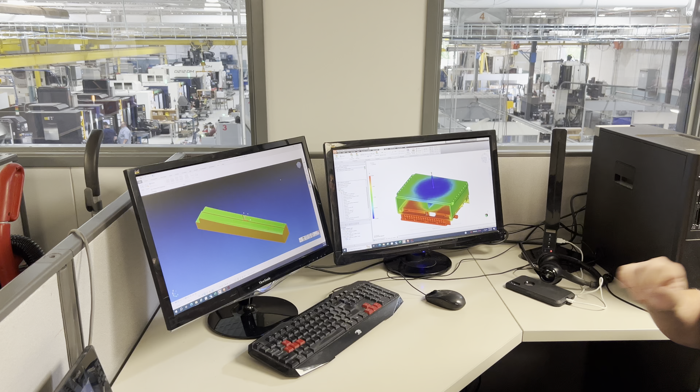So Dave, what are we looking at? So this is our Moldflow software that we use to analyze and predict what is going to happen to a plastic part when we injection mold it. It looks at warp, it looks at fiber orientation of the plastic if it has a fiber in it.

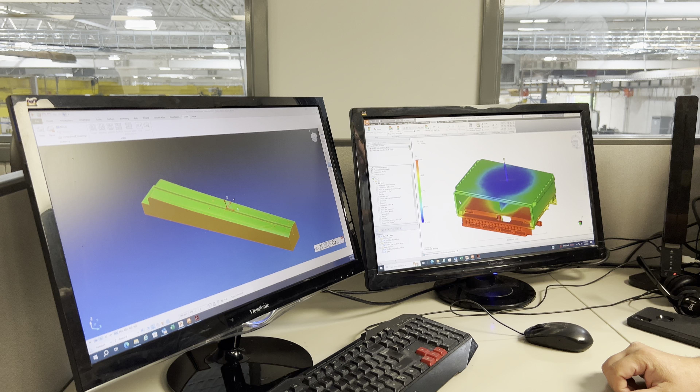It is basically like an FEA. It really doesn't do a lot with strength, but it will predict warp very well. And then, can we fill the part? Where are we going to gate the part at? This will tell you where to gate? Really? Yes, it'll give us a suggestion of, okay, these might be the best areas to gate, and then it's really up to the operator, the designer of the injection mold.

One, from experience of saying, okay, well, because of the style of machine we're going to use, the mold base we're going to use, may have some things that lock us into, okay, we have to gate in maybe a couple options that we have. So they'll decide which is the best option, depending on what mold base we're using, the materials and all that kind of stuff, to figure out where to place that gate at.

And we want to make it as simple as possible for gate removal at the end. Sometimes we have to machine the gates off. Well, that gets expensive because you have to build a fixture and all this other stuff. So if we can do it with a set of clippers or a file or a razor blade to take a gate off or just breaking it off, then that's what we do.

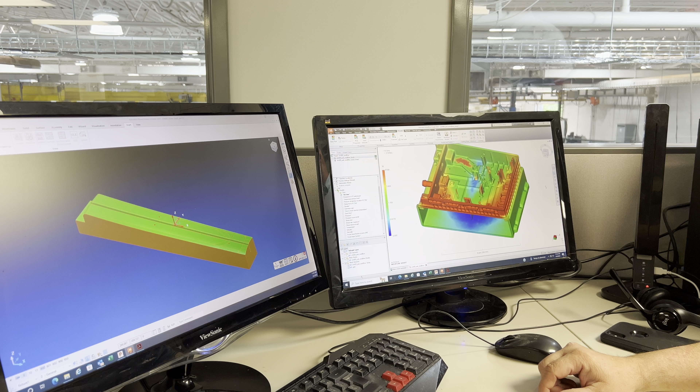This particular part is an overmolded part. So there are metal brackets and terminals that get overmolded inside of that thing. I see a lot of red. Is that because it's cooling down? That's the fill time. Okay, so what that means is that's the last section of the part to fill as the plastic's going through it. And you can simulate the plastic flow, right? Yeah. So it's being gated in the bottom there, and it kind of fills up.

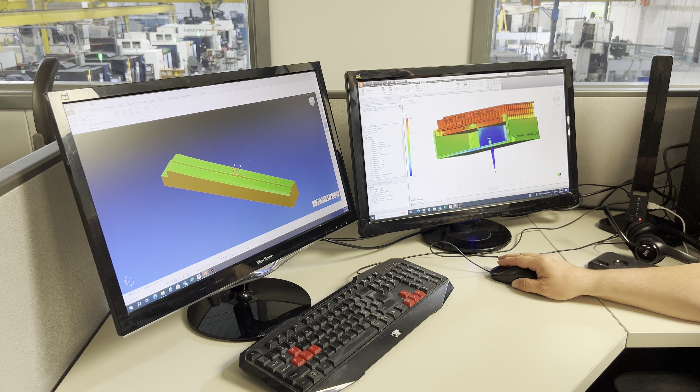So what we try to do is make the filling as even as possible. So we want the last part on this side and this side of the part to fill at the same time. That way it reduces warp. We know if we have one hot spot that's the last corner to fill, it may not fill, may gas up, may have some issues with filling.

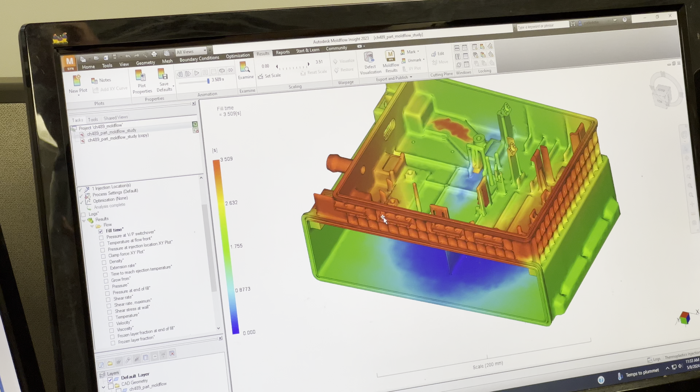So we're able to change things around, and then also look at the process. What injection pressures are we using? How much heat, our water lines, we may have to change water or hot oil depending on what we're doing. Have to change that around to get better cooling on the part. If we know we have a spot that is getting, let's say, very hot at the end of the fill, because typically the end of the fill is a little bit hotter, it likes to burn from the gas and things like that inside the mold.

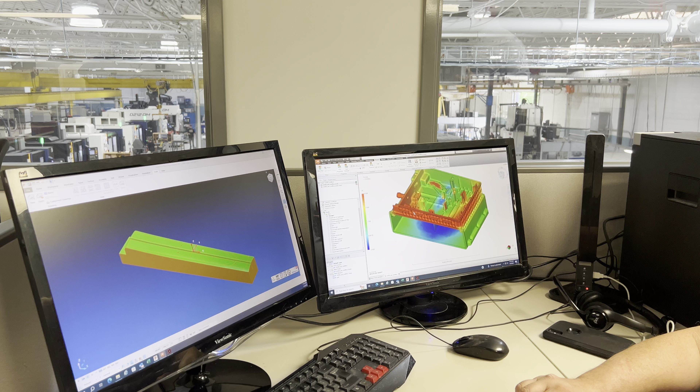So we can also analyze venting because you have to get the gases and the air and all that stuff out of the mold as that plastic's coming in, because this will be filled in just a second, right? And it's completely filled, and then you just go into the packing stage. Well, we can adjust all those settings up here, and then all that information is given to the injection mold operators, the setup guys, to process the part.

Cool. So when you were talking about the gates, it tells you where to put them. Does it tell you how much volume is going to come through each one of the gates, or anything like that? No, not really. But there's some standard practices on gating.

You know, runner systems and gating, and the plastic suppliers let us know what the flash point of the material is. So it might be a thousandth, it might be half a thousandth, it might be two thousandths before the plastic actually starts flashing, because we need to know that when we design our vents, so that we're not squirting plastic into the air vents and plugging those up and then having to trim those off the part.

And flashing is, I'll let you describe it, but flashing is something that you really don't want, and it usually is around the outside edges. It's around the perimeter where the two halves of the mold come together. And that's where choosing the right size press, enough tonnage to hold the tool closed, because the mold machines are rated on clamp tonnage, but they have to hold back the forces that you're putting into that mold.